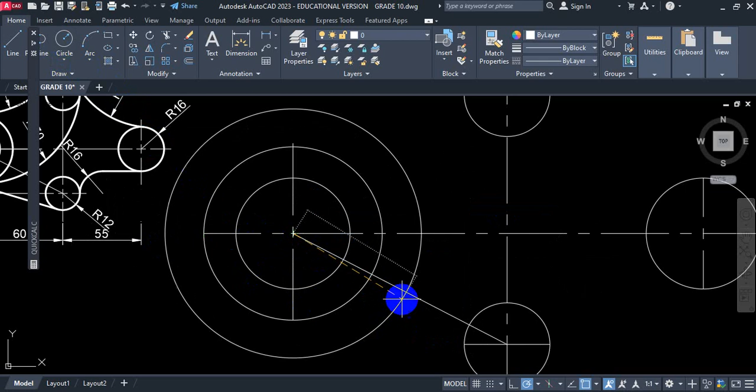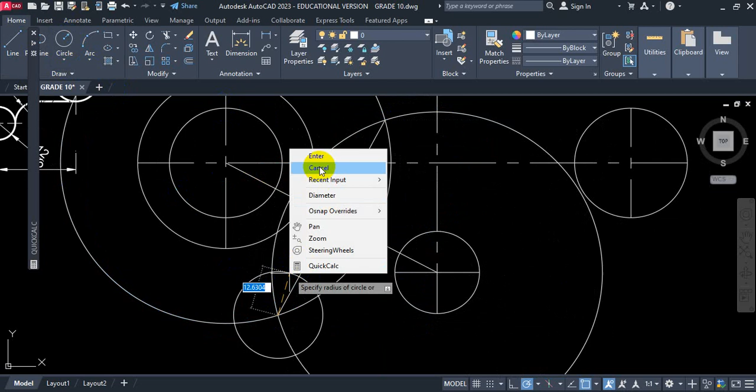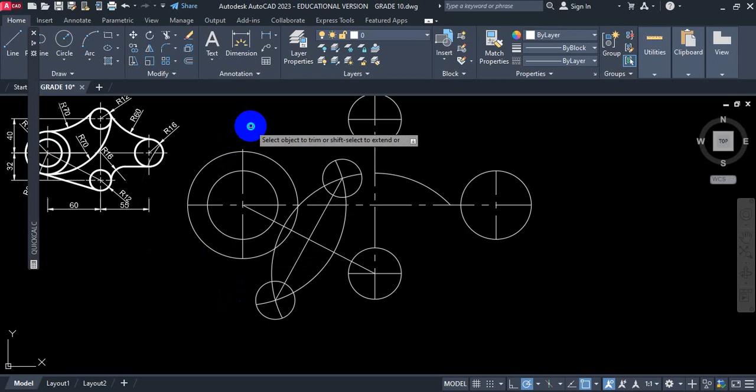Open your compass more than half, do the same thing, place your compass at this side here, more than half. Now we're bisecting this line, we get the center line. Let's make sure that it looks the way it will if you are using your compass. Let's do it properly. How you would use your compass, that's what is going to happen with me, so that I make sure that it looks like how it will look if you're using your compass. Trim that, and trim that. So basically this is what you would have with your compass.

Now there's the center. On this center, draw a semicircle. If it's touching here, it should be touching the other center as well. So with this semicircle, I'll draw it more to the bottom or more to the left hand side, right? So I'm going to move this away, I'm going to move that away, so that when I say it's a semicircle, it is a semicircle on your case as well. So now there's my semicircle.

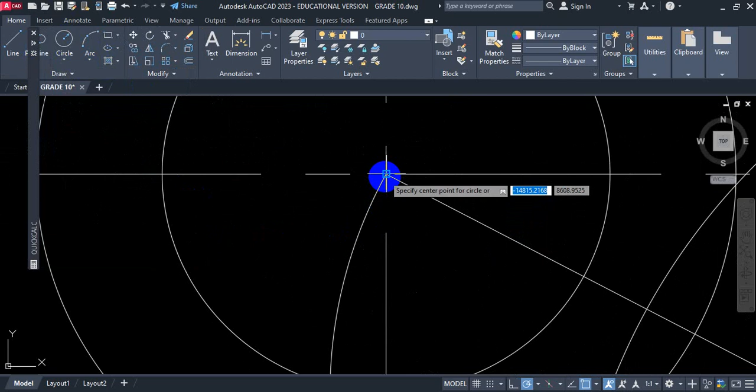Now on this semicircle, I've got to remember that there is a radius 25, the big circle, and there's a radius 12. So I need to say 25 minus 12. So I'm going to say 25 take away 12 is equal to 13. So I need to draw a circle or an arc onto this big circle, which must be radius 13.

Right, just repeat that so that I actually pick it up. When it's 13, I must draw a radius of 13. So this is radius 13. All right, your radius 13 simply means that once it touches the semicircle, that will be the point.

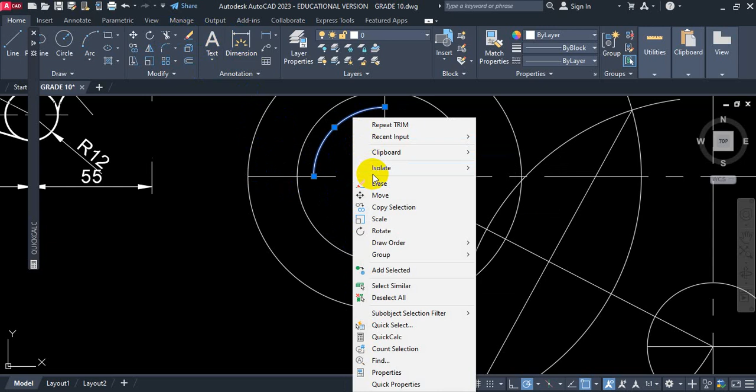Let's quickly double check if this is actually 13. I'm going to double check from there to there. Yes, it is 13. So there's our radius 13. Once it touches the semicircle, so that becomes your point.

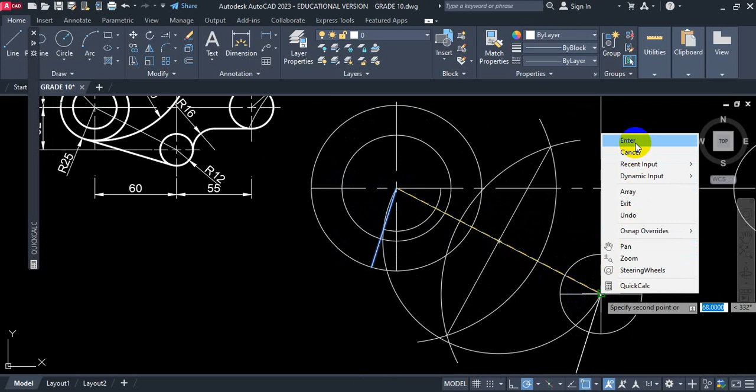So from the center through that point of intersection, you stop. And of course, it must extend to the circle at which your tangent will be touching. Then from that point, we'll slide our set squares to the next circle. So it then means we have found our blending point. That's our point, and that is our point.

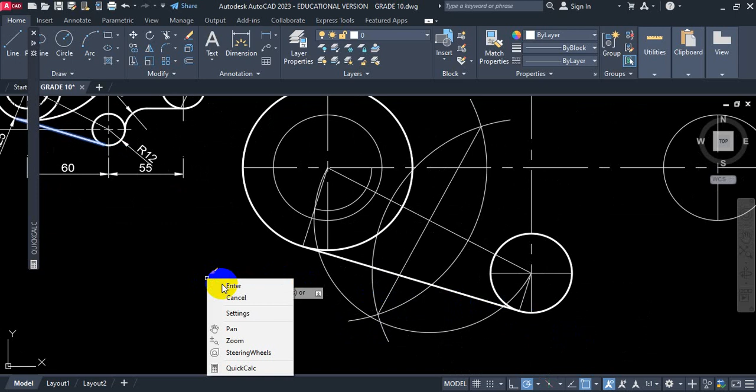So now we need to draw a line from this point to that point. Now we have our first line, which is that line. So this must be dark, that must be dark, that must be dark. For now, this is what we have found. So you don't erase these constructions, you make them as they are.

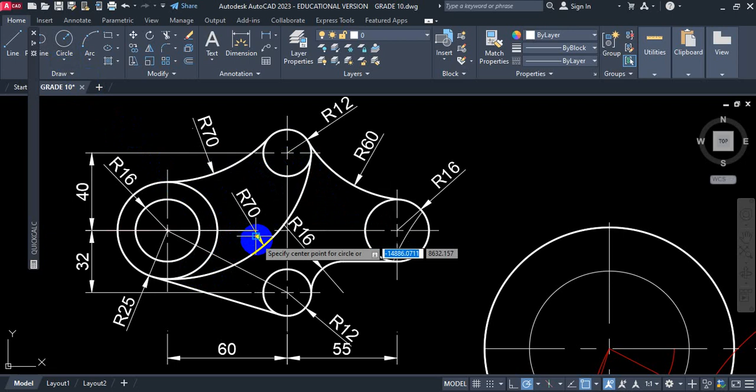Moving along, now we move on to this arc, radius 70, and that arc of radius 70. Now, this arc is touching radius 25. This R70 is also touching radius 12. Right? So, what we need to do is we need to subtract 70 from the 25. So how much is 70 minus 25? That should give us about 45. Let's double check. Our math says 70 minus 25 should give us 45. Yes, of course. So we're going to start here and say 45.

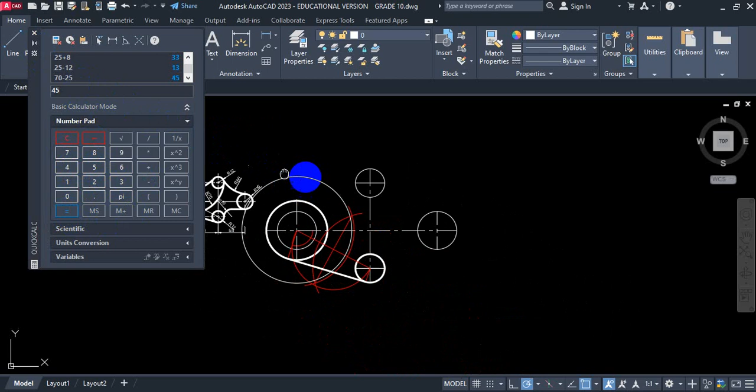That's our radius 45. And the next circle that is touching is radius 12. So 70 minus 12. So 70 take away 12 should give you 58. So on this circle here, you're going to say 58. So where these two intersect is here.

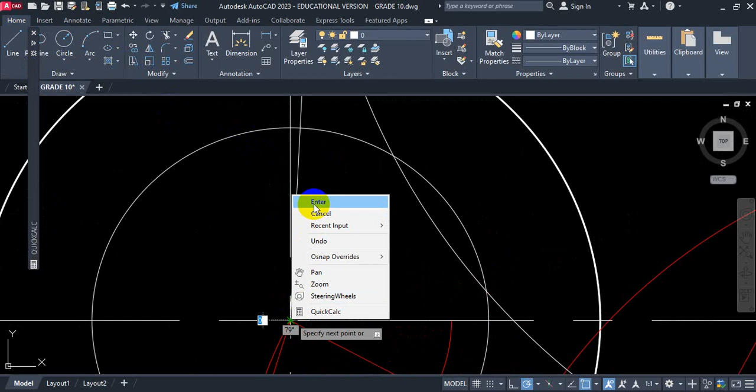So from that intersection to the center, to this center, and from this intersection to this center. But of course, we can see that is touching on the other side, which is on this side, is blending onto this side. We will therefore have to extend this line from the center, extend, so that it's there. And we will have to also extend this line, which goes to until it goes to 25, which is this line here.

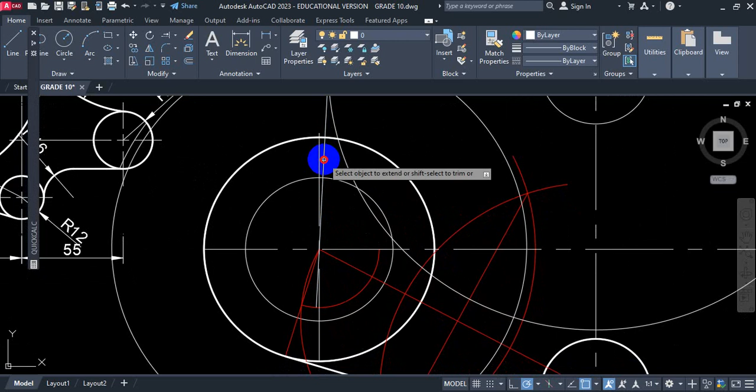Extend again. We need to extend this line. We need to extend this line.

There it is. Extend again, there it is. Now this is the point that you're looking for. Let's make sure that my construction looks just like yours, so my construction should look like this, just like how yours would look.

That minus that and that. And of course I'm going to take away this, take away that, and then move everything here. Now your construction looks like that.

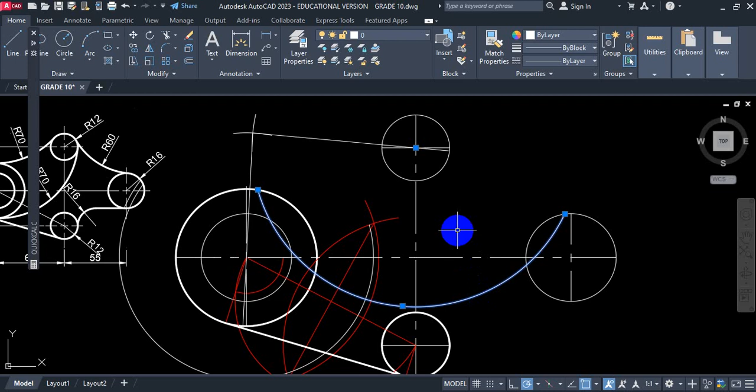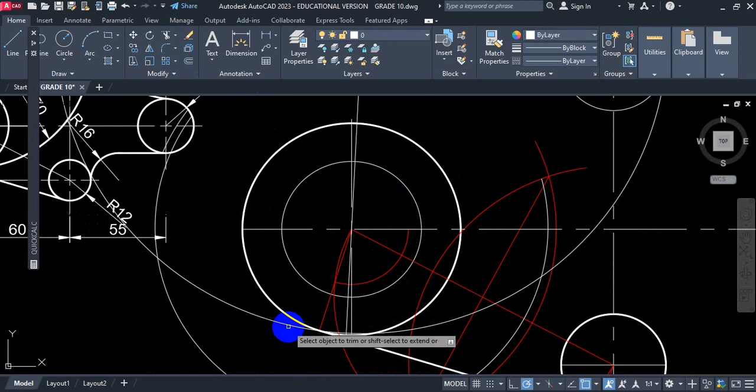So now I'm going to place my compass at this intersection. If I open it to any of these blending points onto this point, it's definitely going to touch that point. If I come here and go here, it should be touching at the same point. We will then have to take away that and take away that. Now we've got our point, our arc, so we can now draw our arc dark.

There's the arc, it's blending. Let's take away this. Now that is sorted. Now we need to draw this arc, radius 70 again.

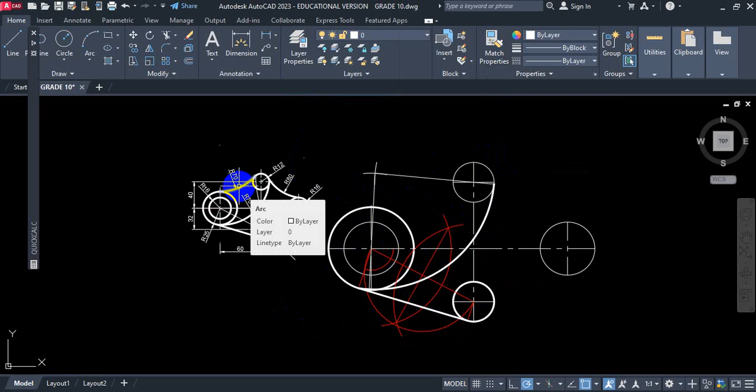Moving on to this arc now. Here we will need to add. Here we subtracted, here we need to add. It's touching the radius 12 as well as radius 25. So we're going to say 70 plus 25, this should give us 95. So the 95 is coming from this circle here, the big circle. So we should get 95.

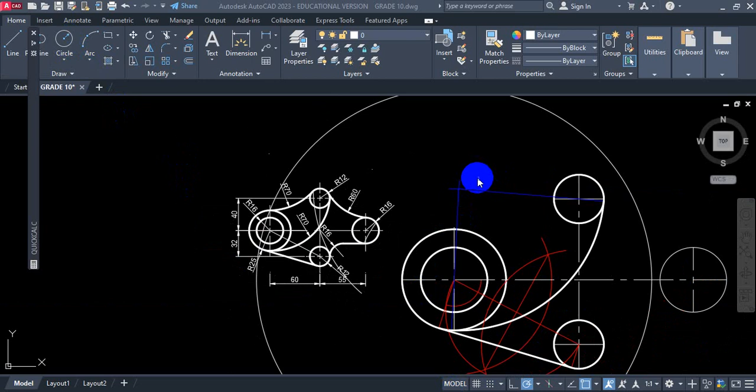So arc 95 we have, then we add 70 plus 12, which should give us 82. So 82 should be starting from here, then we get our 82 there. Then we have this intersection.

Let's make sure that it looks just like yours. If we're using a compass, this is what you end up having with your compass, and there we go. That will be your arc on top there. Okay, let me take this out quickly, let me take this away as well, because I don't really need that.

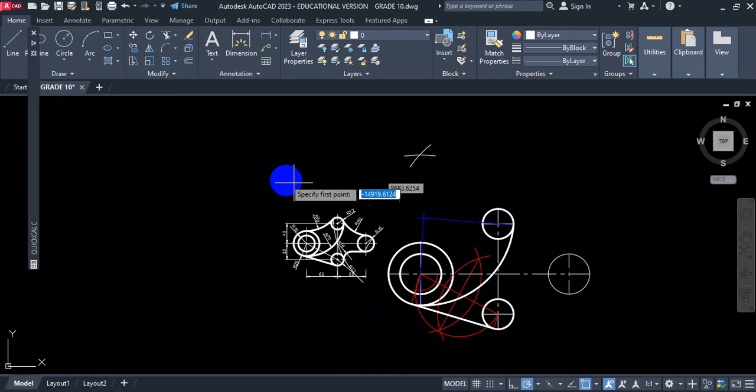Now, from the center, it must go onto the intersection and come back to the center. There we are, this is the point, this is just next to the circle. That's the point where they will blend, and this is the point where they will blend.

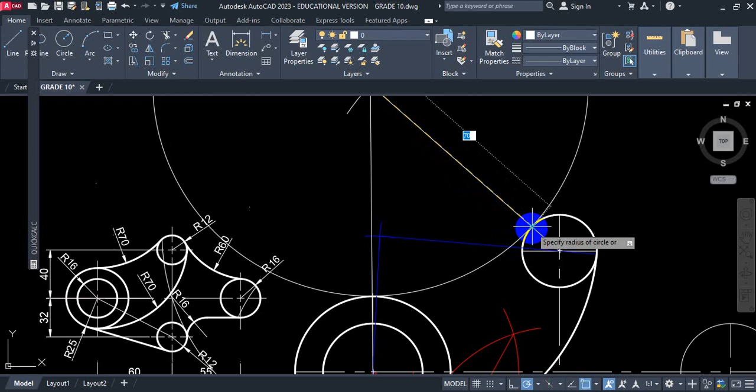We will then place our compass on that center. If it's touching this point here, it's going to touch the other point as well, which is this point here. So let's use that one. Therefore, this is what your arc should look like, touching this only at one point, you can see that. So we're going to now make sure that our arc is dark.

Remember, do not erase the constructions. This arc and that arc, same method, is addition. But you must know that your compass point should be on this side. But now we're adding radius 12 and radius 16 on the 60. So 60 is a big radius, so 60 plus 12 and 60 plus 16.

So 60 plus 12 should give us 72. So we're going to place it onto this circle to get 72. There's our arc.

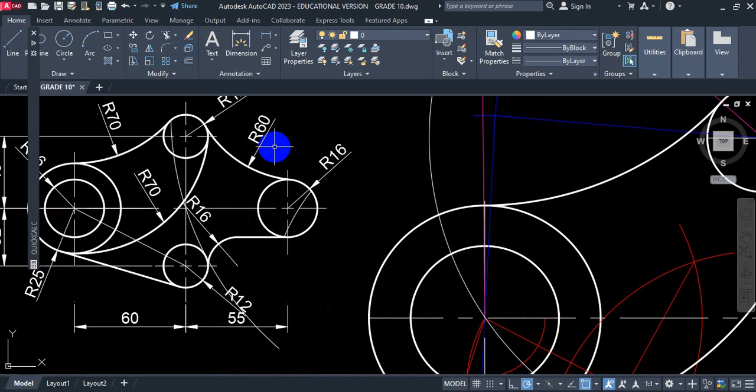Then you're going to say 16 plus 60, which gives us 76. So we're going to place our compass here, then we get 76, that is our 76. So there's the intersection here, that's your intersection, and that's what your arc should look like.

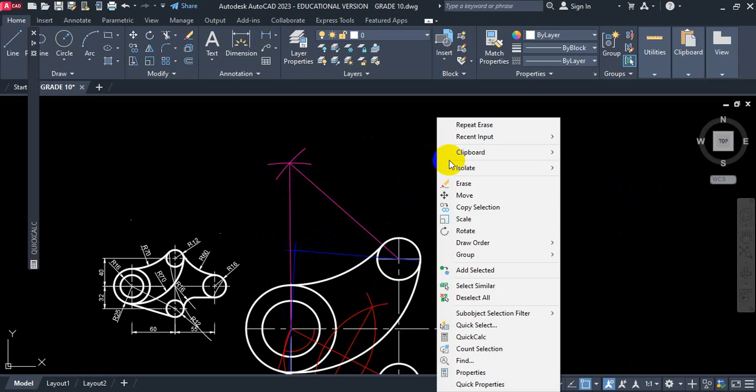Let's take these things out before they disturb us. Now it's looking nice and beautiful. From the center to the intersection, draw a line. To this center here, we draw a line. Then we find the blending points. This is where it's going to blend, and that is going to blend.

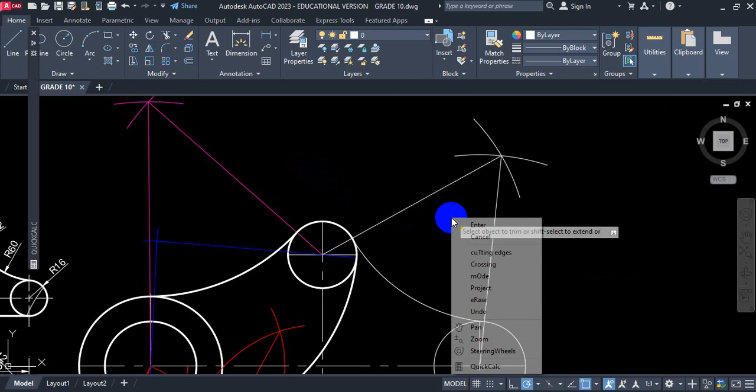We will then take our compass, place it on the intersection, take it to any one of the points. If it's here, definitely it's going to touch there as well. So you then draw your arc. Now that's what your arc looks like. Then let's make sure that it is drawn dark. So that is our arc.

Now we need to draw this line and that arc. When it comes to this here and that curve, radius 16, what we'll then do is on this point here, you're going to do a construction line, and onto this circle we'll draw another vertical construction line.

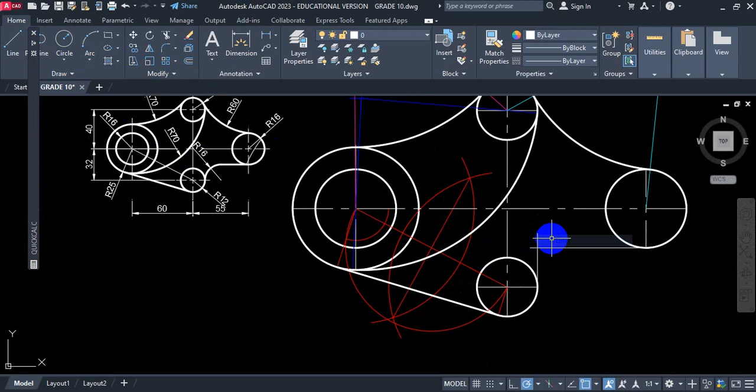Since this is radius 16, this curve is radius 16, what we'll then do is we'll make sure that we measure 16 away from this line. There's my 16 and there's my 16. So let's just double check, this is 16. Yes, it is 16. And let's double check, this vertical line is also 16.

So now this intersection here is your compass point. So if you place your compass here, it's going to touch that, it's going to be 16, and it's also touching this point. So that's how you draw your 16.

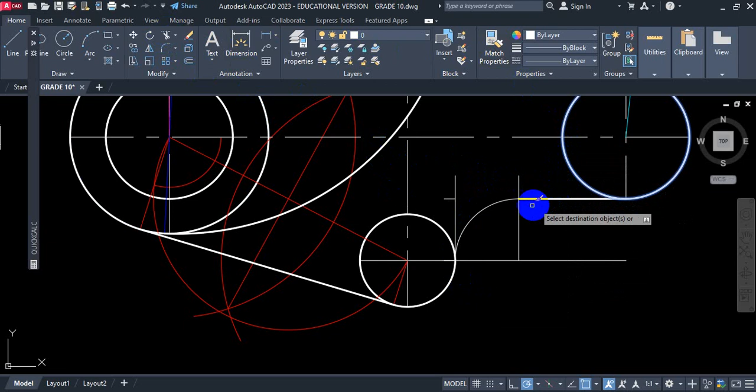So you'll then trim, or rather darken what you need to be darkened, so that your drawing looks like this. And what needs to be dark in this case is this line and that curve. So you leave your constructions as they are. So this is how we'll do the typical drawing that looks like that.